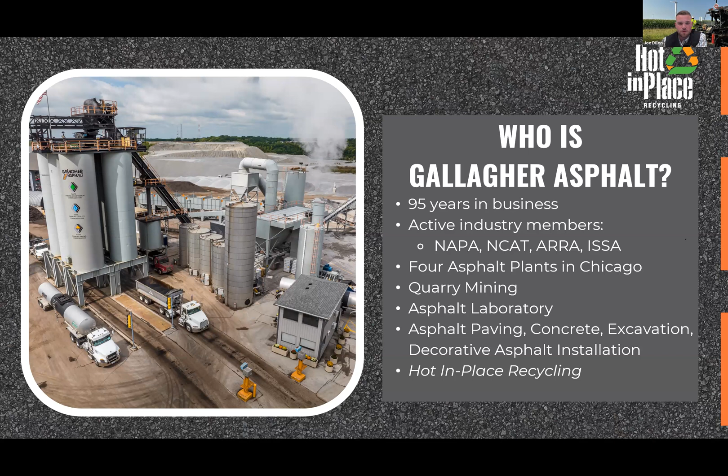Again, I'm going to click through this fairly quickly, but these are some of the associations, some nice representation of where we're active industry members. Like I said, this grows as much as we can. We try and be as active in as many membership organizations as possible.

So hot in place recycling, where have we been? Gallagher Asphalt's been all over the nation for this. As you can imagine, if you've heard of hot in place, we're not the only people who've been all over the nation. So we've been anywhere from Michigan to Indiana to Illinois, which is the Midwest. We've been out to New Jersey. We've been to Tennessee. We've been to Georgia. We've been to Wisconsin, Minnesota, Missouri, Alabama, believe it or not, California. And next year we're going to Virginia. So hot in place recycling is not local just to the Midwest or Chicagoland like traditional paving is for asphalt plants. Hot in place recycling is a nationwide process that can be used and benefited by many people. And that's why we're here today talking with NACE.

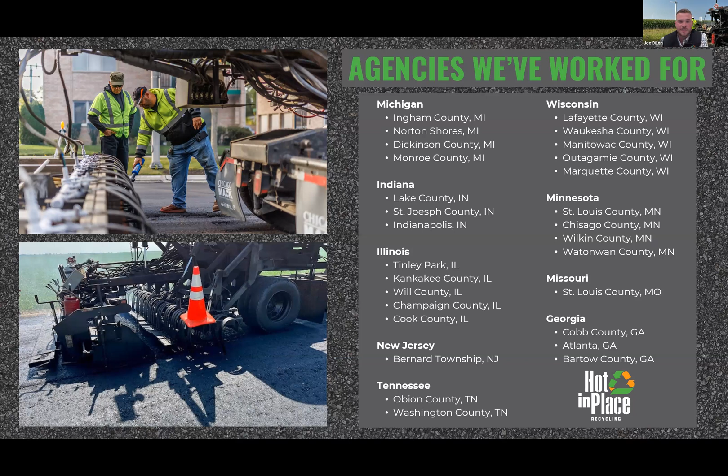So what the heck is hot in place recycling? Now you probably are like, geez, Joe, when are you going to get there? So hot in place recycling, this is the federal highway definition, is an on-site, in-place pavement rehabilitation method that consists of heating, scarifying, mixing, placing, and recompacting existing bituminous pavement. So very, very simply, that's what it is. And I'm sure you're wondering, what are the candidates? What road would be great for hot in place recycling? And I'll kind of get to that in the next slide.

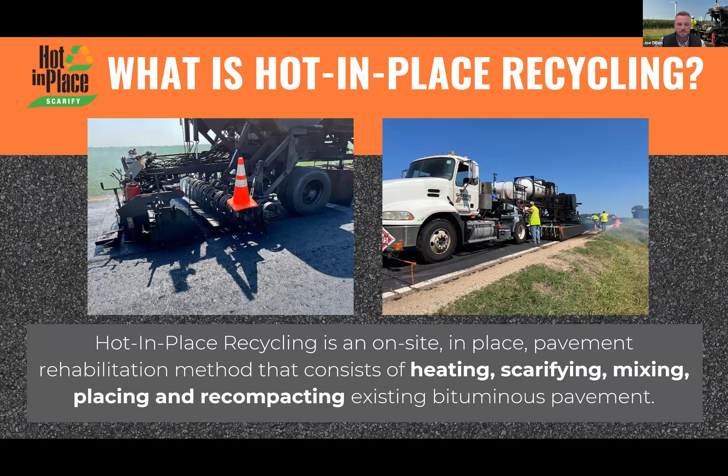So the next slide is a great slide that shows where Hot in Place recycling fits. Hot in Place recycling is one of the many recycling processes that people are using nationwide. And we encourage and promote anyone who uses recycling or anyone who uses a process that benefits their roadway. So you can see on the left that cold planing, a mill and overlay, is a traditional process that can be used from a good road to a fair road to a poor. And we know this. Sometimes we do it when it's very poor. We might do mill and overlays a little too often sometimes.

Hot in Place is that step that goes right when the road is getting to a point where there's top-down issues, or the top surface layer, 3 inches and above, is having some cracking, thermal cracking, fatigue cracking, stuff like that. And Hot in Place is the first step of pavement rehabilitation. It's an affordable way to recycle your roadway that's already there, and then you can put a capping material on top of it that you can build structure with the road. You can save the road a myriad of different ways and be creative and effective in using Hot in Place recycling to ensure that your road is salvaged in a way that it can be brought back to a life where it used to be.

And so rather than doing a mill and overlay, where there's traditionally not structural benefit and you're traditionally paying quite a bit, you can use Hot in Place recycling for that 3 inch top surface cracking. The next step is cold in place recycling. If you have cracks or you have a structural issue, Hot in Place is not the solution for you. If there's any base failures or structural issues, you might want to call on a cold in place recycler, or that next step would be a full depth reclamation.

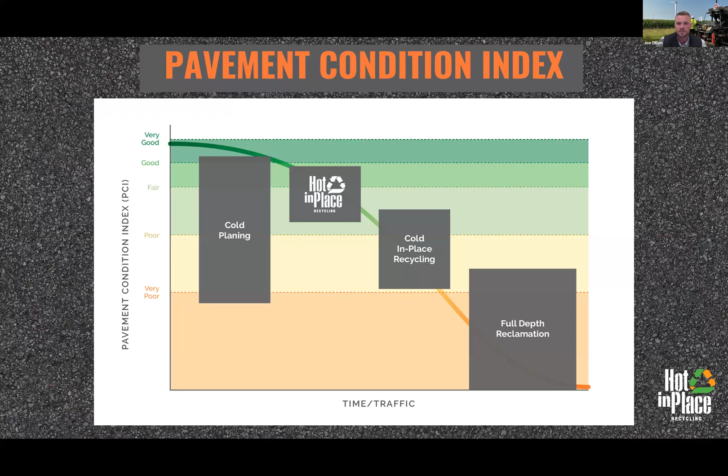So what the heck are candidates? Well, here's some typical candidates for Hot in Place recycling. Kind of like I noted, I got a little ahead of myself there. Hot in Place recycling can be for thermal cracking. It can be something that helps with raveling. It can be something that helps with fatigue cracking. It can be rutting, where maybe you have the wrong mix design on a road and it's just rutting due to traffic going over it. That's a great candidate for Hot in Place to help you fix those ruts.

Or patches. Now, let's say this happens often. Let's say you have a roadway that has utility cuts 7 times across a road over 4 miles, and you're like, geez, I want to get rid of those vertical edges. Hot in Place is a great way to make that road monolithic by going over it, heating the road up, mixing it, rejuvenating it, and making that mat monolithic and getting rid of those vertical edges on patches. So if there's an HMA patch in the roadway, that's a great candidate for Hot in Place, as long as it's not structural. So we kind of know what the candidates are. We've been talking a little bit about that.

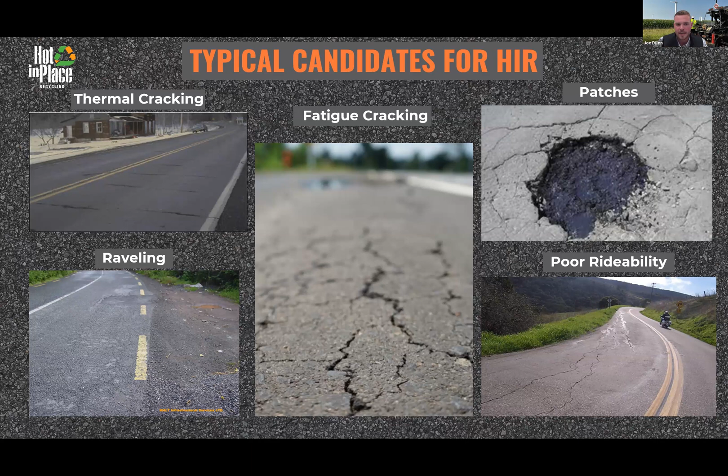What the heck are the non-candidates? Well, non-candidates would be these. So delamination: if there's no bonding course whatsoever, Hot in Place is not going to be a great candidate to help you, because there's no effective way to bring that bond back together for your roadway. We would not be doing a service to the respective township, county, or municipality that has a delaminated surface.

Unsuitable base. We see this a lot in the Chicagoland area. Alleys and roads used to be brick. We've put pavement on top of the brick. Well, if there's not a sufficient amount of asphalt, call it 2 to 2¼ inches for hot in place recycling, and there's an inch and it's on top of brick, it's not going to do anything.

Well, excuse me, it's not going to benefit the alleyway or the roadway if there's something with unsuitable base underneath it. Overpatched roadway. Oftentimes we see candidates that have just been hit a little bit too often with cold patch. And so not HMA patching, but cold patch with the mixture that when heated up, the diesel does not appropriately dissipate, and the chemical mixture of the cold patch does not work well with our heating process. It actually segregates the material more, and we cannot effectively help the customer nor the client nor the municipality if it's overpatched.

And as you can see in the bottom right, a collapsing roadway. As I've noted, we're not the solution for structural integrity. We're not going to fix something where the structure and the base is failing. We wish we could, we would really love to help, but that's not something we can do.

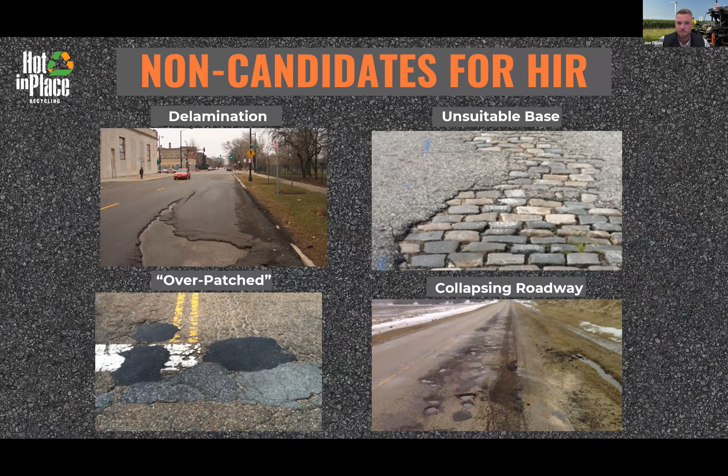So what's the first step? Well, the first step is actually not going out there. We're going to get to this because we have some experts here on the panel from the lab, like I mentioned, so we'll open this up to Q&As. But before we go out there, we want to ensure success. So we're going to pull a set of either six 6-inch cores or ten 4-inch cores on the respective roadway and do what's called a penetration test and make sure the road is actually a candidate, right?

Because all we can do is drive the road. I'll drive the road with you. Some of our other Gallagher representatives that work in the hot in place division can drive a road with you. We can go out, we can do a lot with our eyes, but we can't do everything. So we're going to pull cores, we're going to send them back to the lab, and we're going to make sure that we can actually help you out, because we don't want to put somebody in a bad position where we can't help you out. So before anything, that's what we're going to do.

Now, let's say this road's a great candidate. We can make it happen. And we'll come back to this slide. I know I'm moving a little bit here, and I apologize if I'm moving too quickly, but we can come back to this slide and go in a little bit more detail about the penetration test. Well, maybe not me, but the experts can go in more detail and show you what those numbers can look like for the feasibility of a hot in place roadway. There's a little bit of it shown on this screen right here.

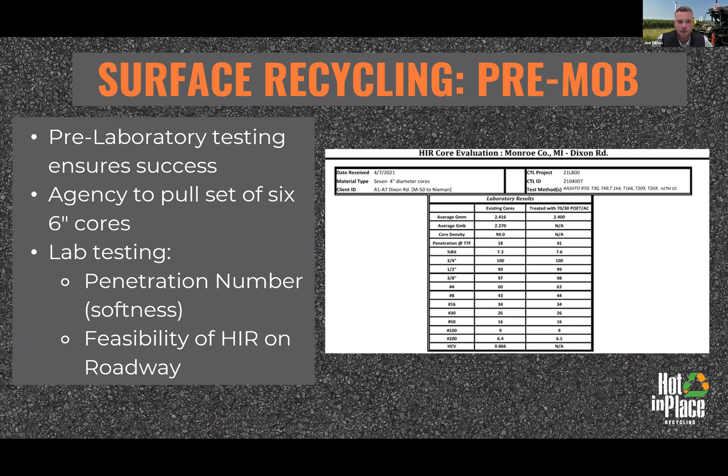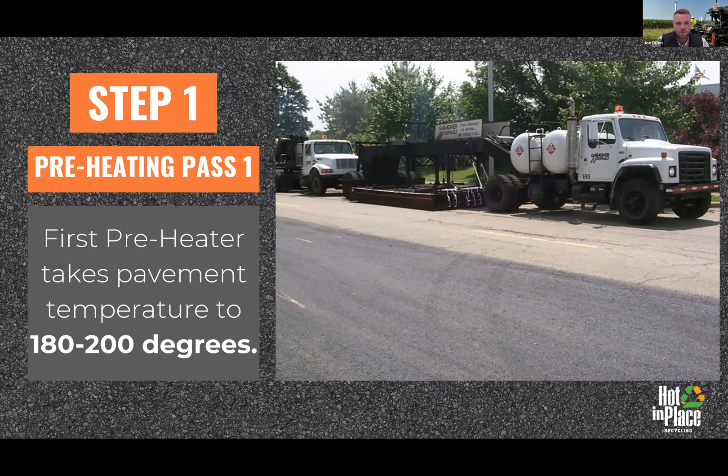But let's say this road's a great candidate. We're going to go to step 1. So what's step 1? Step 1 is the first preheater. It takes that pavement temperature up to 180, 200 degrees. Very simple. It's just heating the roadway so that it's malleable again. As we know, asphalt's a viscoelastic material. So if you're using that heat to heat it back up, it can be disrupted, and our scarifiers, which you'll see in a few steps, can move that material around. So step 1 is that preheater. That's the first pass. It gets it hot, gets it warm again.

Then it goes to preheater pass 2. So the second preheater with our process takes the pavement up to 280 to 300 degrees. So many of you asphalt people know, okay, that sounds about right. That's about the temperature it comes out at and gets laid on the road. Exactly. We're getting it back up to the temperature it was when you first laid it down. We're actually targeting really 285 to 295. That's the sweet spot for us to make sure this pavement can be moved and disrupted appropriately.

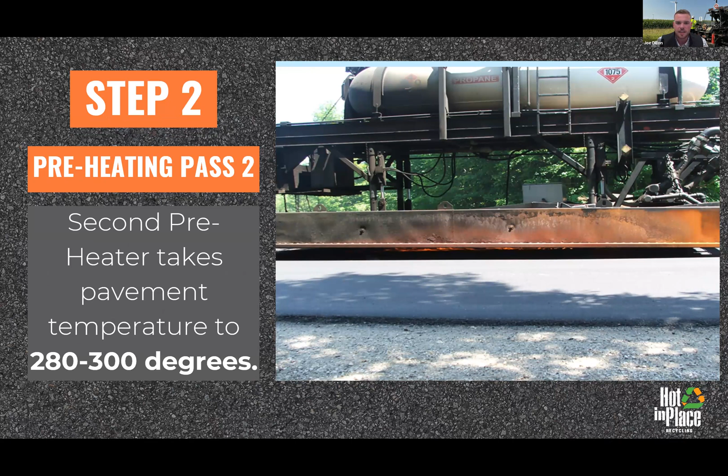Behind that second heater is the rejuvenation step. And so the rejuvenation step is we have a rejuvenating agent that is applied evenly across the mat that is now very warm, and it's being soaked into that mat. The application rate ranges based on the roadway and the testing. It's typically close to 0.1 gallons per square yard.

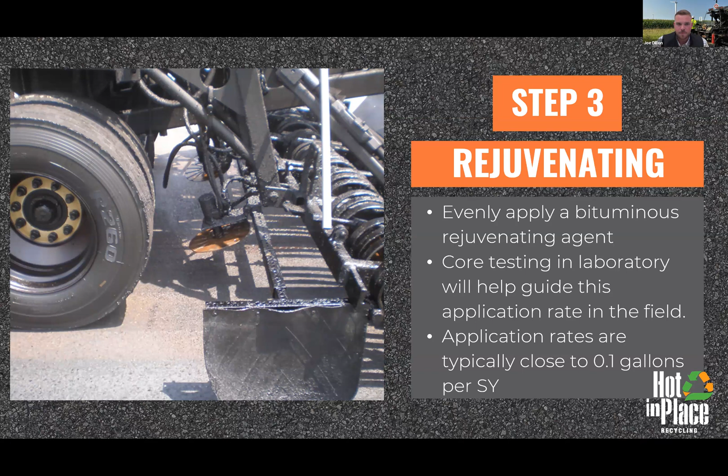And we're spreading that around, letting it soak in. And then next step is we're scarifying. So we're moving and disrupting that mixture. And there's spring-loaded tines at the prescribed depth, whatever the job calls for, that move this asphalt and let the rejuvenating agent mix in deeper at the appropriate depth, typically 1.5 to 2 inches.

And as you can see here, and we'll get to this a little bit more too, because this is a great question often: well, Joe, what the heck are we gonna do with structures and manholes? Well, these tines or these scarifiers, they're bolts, they're spring loaded. So when they hit those structures, they actually pull up and make sure that you're not going to disrupt the structure. So we scarify the material and then we mix it.

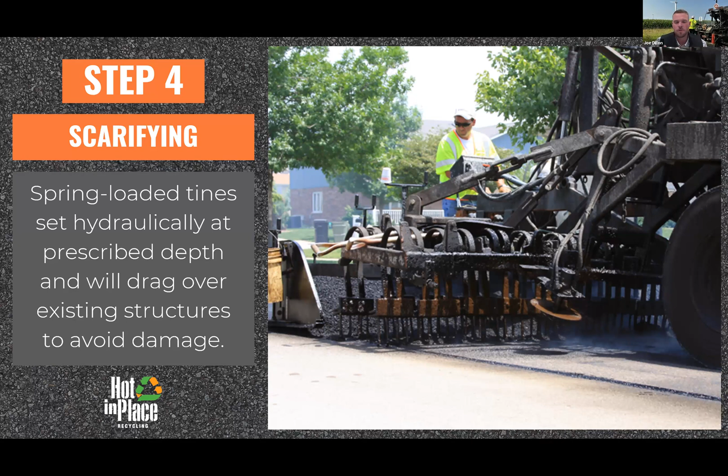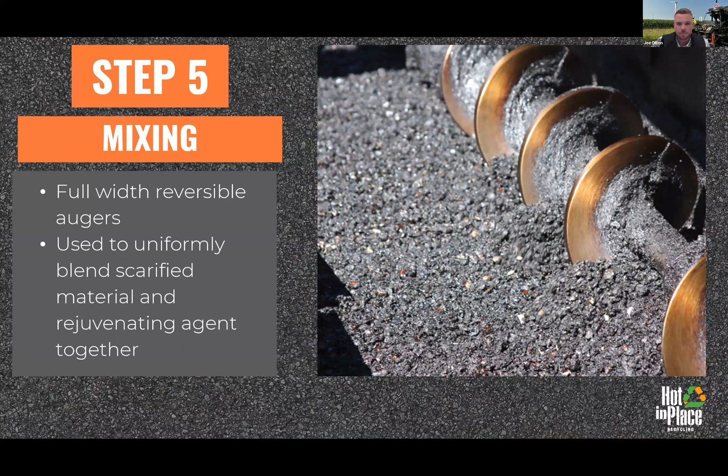So we have full width reversible augers. We uniformly blend this material, the rejuvenating agent, the warm asphalt, we blend it all together, and then it becomes a paving process. That's all it is. And so we pave. We reprofile the road, and we eliminate the center line joint. One of the greatest benefits of hot in place recycling is, because we have the heaters and the oil on the roadway, we have the ability to change things on the roadway.

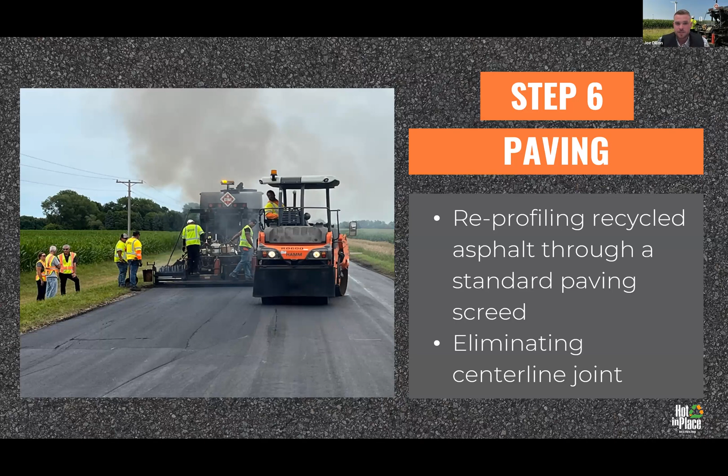The next step, again, very simple. It's a paving process. The next step is compaction. We're targeting the same densities as traditional asphalt. So we use a combination roller pictured here. It's a rubber tire and a steel drum, and we get that material kneaded and dense. What we do is the old test where you do as many passes until you get to max compaction, then you take one pass off. And you make sure the density is where it needs to be, and you test it accordingly. So we compact the road.

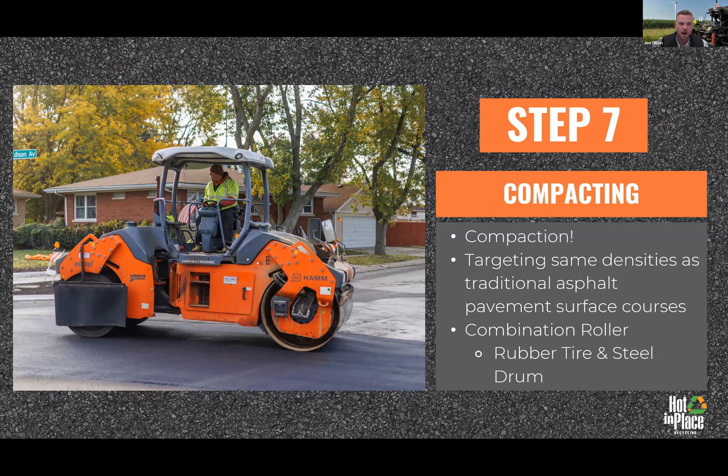And then when we're finished with that, we have a little bit of a pause. We wait for somebody to cap our process. But before that, it's open to traffic. We have the benefit of our process being open directly to traffic right after the roller gets off the road. There's no cure time, there's no wait time. You can drive right on it. In fact, we like that because all these truck tires actually help make sure that the roadway is being rolled correctly. We roll correctly, but it's like thousands of little rollers on the road.

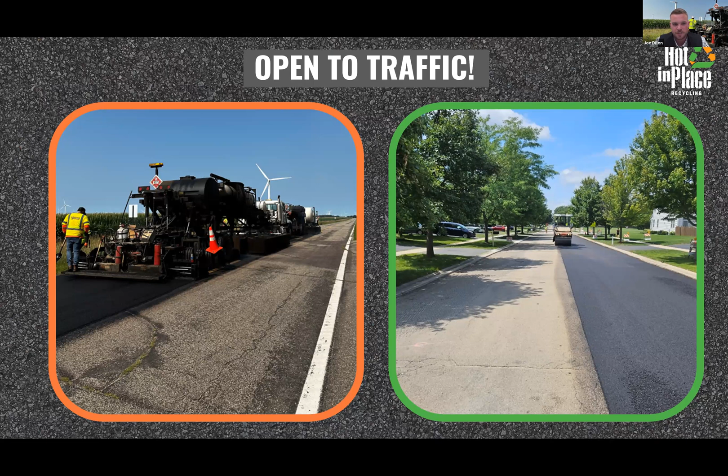And on the left, we've got a picture of chip seal. On the right, we've got a picture of surface course with an edge mill in a municipality in Illinois. And then we have some great pictures here. On the left, again, is chip seal. And on the right is a road that looks really in tough shape, but the base is still strong. We did testing on this. We pulled cores, and this was an example of poor mix design.

So this is a great visual image of how hot in place can really benefit a road even if it looks really abysmal. However, the base was strong. So that picture on the right is a great example: if the base is still there, this road can be not in the best shape, and hot in place can help us out. So that's a great example.

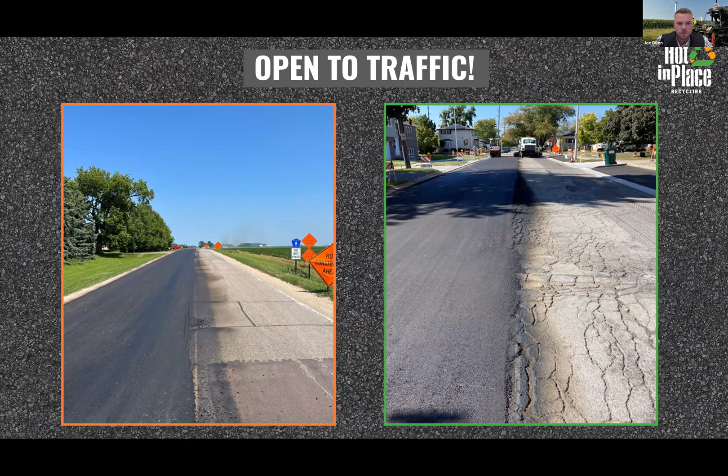And then step 8 is capping it. So we recommend a myriad of different capping, but hot mix is the greatest, right? You want to put HMA on top of this process. This process can essentially be a leveling course in ways. And if you put HMA on top, you're setting yourself up for success.

Chip seal is another great way to do it. Chip seal is extremely effective over the top of hot in place recycling. It's a great product on top of our product. Slurry and microsurface as well. There are different ways to cap this process and to drive on the roadway.

And that's the beauty of this process. It's not limited to just HMA. It's not limited to just certain types of candidates. It can be chip seal, it can be binder, it can be surface, and then it can be capped with hot mix. It can be capped with chip seal. It can be capped with these different slurry and microsurfaces.

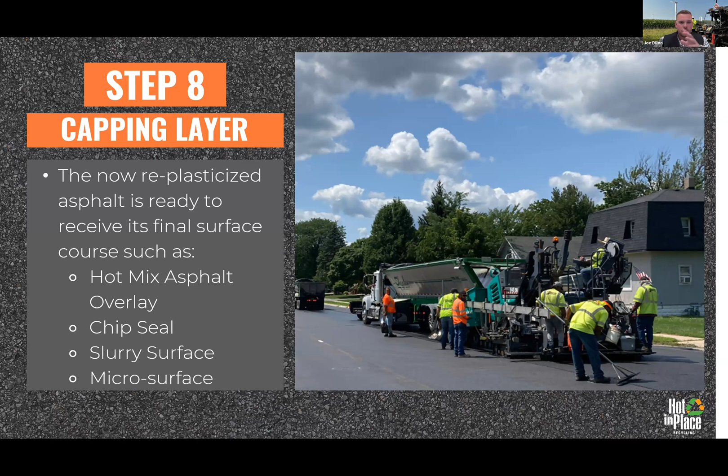So I've talked quite a bit, and we're getting to the panel. But what the heck? I mean, Joe, why the heck are we doing hot in place? You've kind of told us about it. Well, you're eliminating quite a few things. So you're eliminating the mill. You're eliminating a lot of trucks on the road, and actually the next slide kind of has a great visual for that.

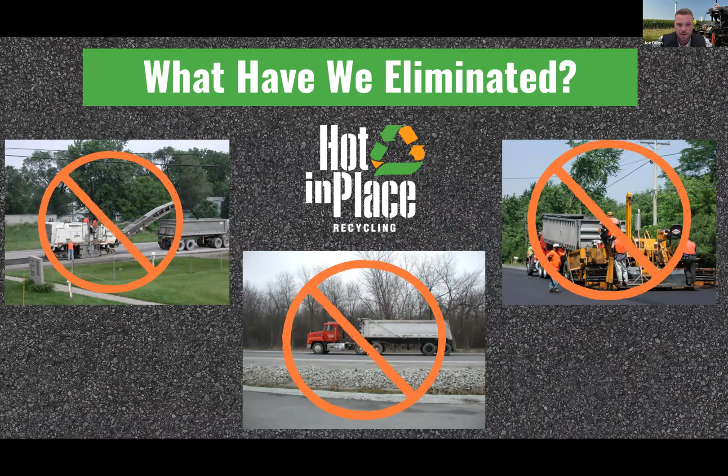So a standard 2-inch mill and overlay, this is based on 20 tons. It's a comparison, an honest comparison is there's 215 trucks. If you were to do hot in place recycling with a 1-inch overlay, it's about 53 trucks on the road. So what the heck does that mean for me, Joe?

Well, I know in my superintendent days, as you probably can imagine, I don't have as much experience as many other superintendents out there, but I did see plenty of times what we would do is we'd mill a road and we let traffic on it and trucks would hit it and it'd be open for too long. And then we keep on patching and we would just keep sinking money into this road being destroyed by our own process.

We were milling, opening it up, reducing structure, and then trucks are hitting it, and then we're patching more and more. Whereas hot in place, you don't have to do that. You don't have to take anything out. You can hot in place and build up, or you can mill half of what you were planning to mill and keep that structure so you don't have to patch over and over again.

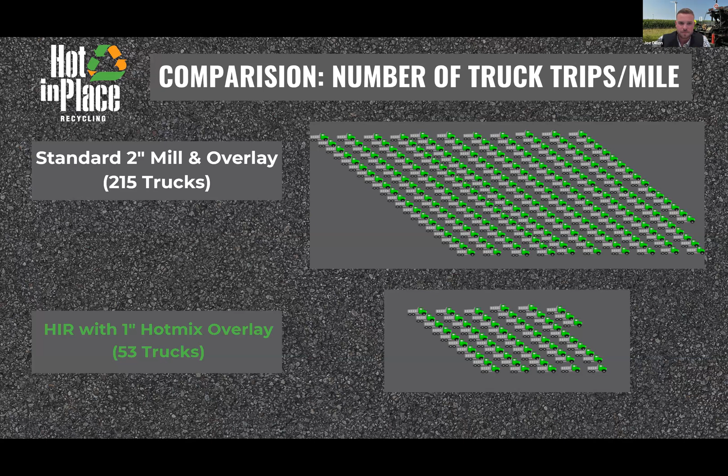So that's a big benefit of the lack of trucks on the road, the lack of traffic being exposed to your milled roadway. So that's a great benefit of hot in place recycling. So, and I've just spoken about this, so we know what we've lost, right? We lost all the trucks. What the heck do we gain, Joe?

Well, when you do hot in place versus a traditional mill and overlay, you're actually gaining structure. Whether it's chip seal, whether it's HMA, you are putting something on top of a rehabilitated surface that is stronger, tighter. We fixed a lot of the issues, the cracking, and we've allowed the structure to be built on top of that road. So you're gaining structure, you're building your road up for oftentimes the same, if not a little bit more affordable cost. And that's a great benefit of hot in place recycling. Typically it's actually quite a bit more affordable, but that's neither here nor there.

And another big benefit too of hot in place, and I'll just say it while I'm on this slide, is, as many of you engineers know, heat doesn't stop at 2 inches. Our scarifiers stop at 2 inches, but heat keeps going. So when you mill and you take out 2 inches, like I said, those trucks hit the road. But when you do the hot in place, by the laws of entropy and thermodynamics, hot wants to go to cold. Energy wants to be balanced.

So heat keeps going down and it tightens up those cracks that are beneath the 2 inches. I'm not saying it goes 12 inches deep, but it keeps tightening those cracks up to 4 inches deep and making those cracks a little bit tighter, a little bit harder to show through that top wearing surface.

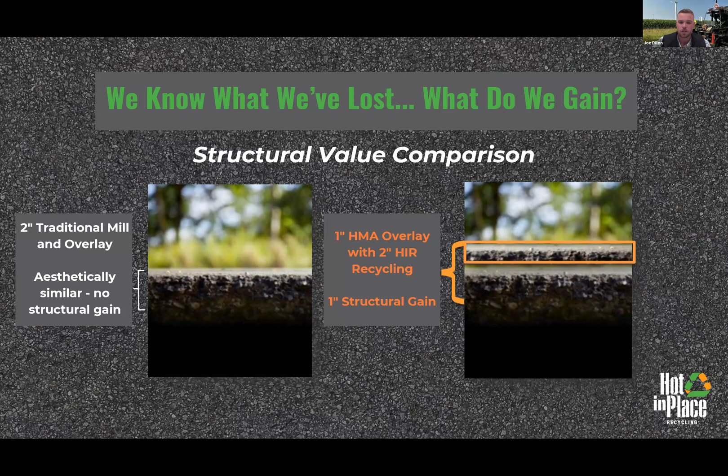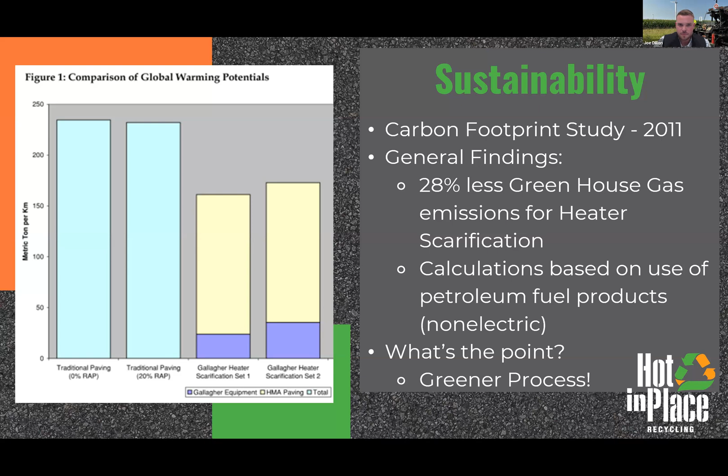We want to protect our earth and our environment. And this is a great benefit of that. Hot in place is more sustainable. And that's just something that we found in 2011, and we continue to find that it's more sustainable than the traditional paving process. And then last but not least, a little bit of recap.

So hot in place is a proven process. It reuses existing roadways. It saves time, typically saves money. It reduces road congestion like we mentioned. It reduces carbon footprint. And listen, I know some of you don't know Chicago very well, but we're still in the Midwest. It's performed by some pretty great guys. So you're getting a good crew and loyal people to help you out and make sure that your road's how you want it to be. We won't stop until we help you out and make sure everything's right.

And so that's hot in place recycling for Gallagher Asphalt in a very, very abbreviated slideshow. So I'm going to stop sharing. I'm going to turn it back to me. I see we got some questions already popping up, and I appreciate everyone bearing with me. And if we need to go back, we can absolutely look at some of these pictures and some of these charts if we need to talk through hot in place recycling.